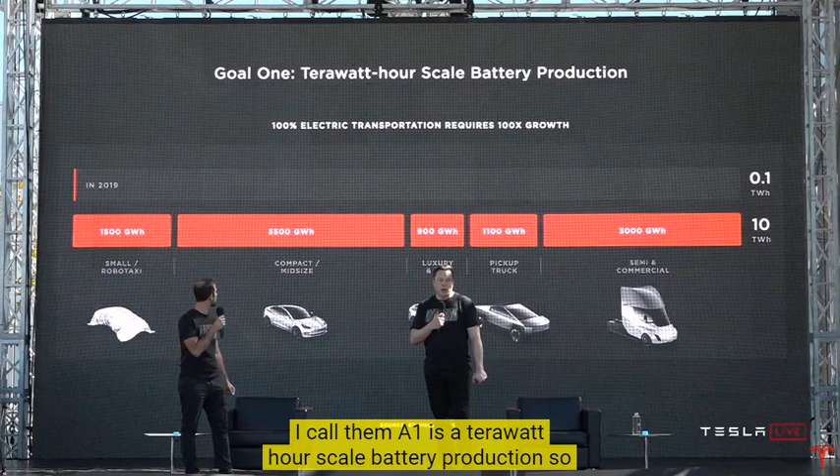So to accelerate the transition to sustainable energy, we must produce more EVs that need to be affordable, and a lot more energy storage, while building factories faster and with far less investment. So goal number one is terawatt-hour scale battery production. So tera is the new giga, and a terawatt is 1,000 times more than a gigawatt. So we used to talk in terms of gigawatts. In the future, we'll be talking in terms of terawatt hours. So this is what's needed in order to transition the world to sustainability.

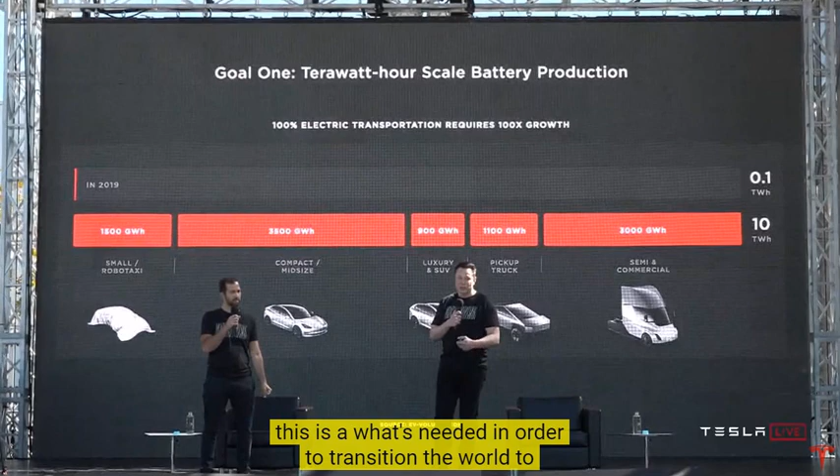Yeah, and you can see we're talking about 100x growth in batteries for electric vehicles to achieve this mission. And we are going to get there. It's just a matter of how fast, and our intention is to accelerate it. Yeah. You basically need on the order of roughly 10 terawatt hours a year of battery production to transition the global fleet of vehicles to electric. And the average vehicle lasts 15 years, so we're talking about 150 terawatt hours, give or take, to transition all vehicles of all types to electric. Yeah, so it's a lot of batteries, basically.

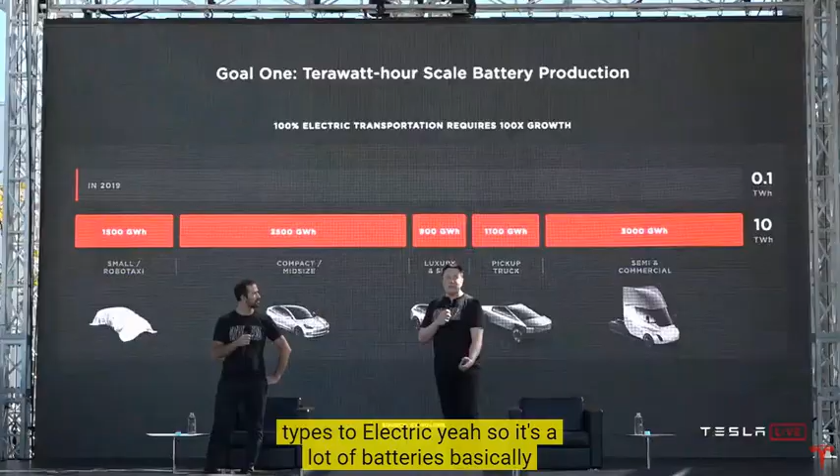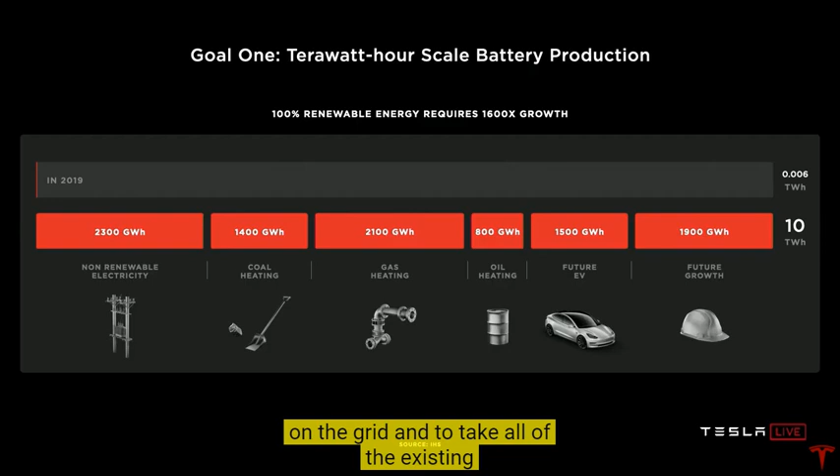And then on the grid side, we have a similar mountain to climb, 1,600 times growth from today's grid batteries to go 100% renewable on the grid, and to take all of the existing heating fossil fuel uses in homes and businesses 100% electric. Yeah, and this number, I think, might grow even more as the world economy matures and as countries with high populations industrialize. But let's say it's roughly 20 to 25 terawatt hours per year, sustained for 15 to 25 years to transition the world to renewable. This is a lot.

So today's batteries cannot scale fast enough. They're just too small. For Giga Nevada, 150 gigawatt hours per year is what we probably expect to make out of there. But this is really pretty small in the grand scheme of things. That's only 0.15 terawatt hours.

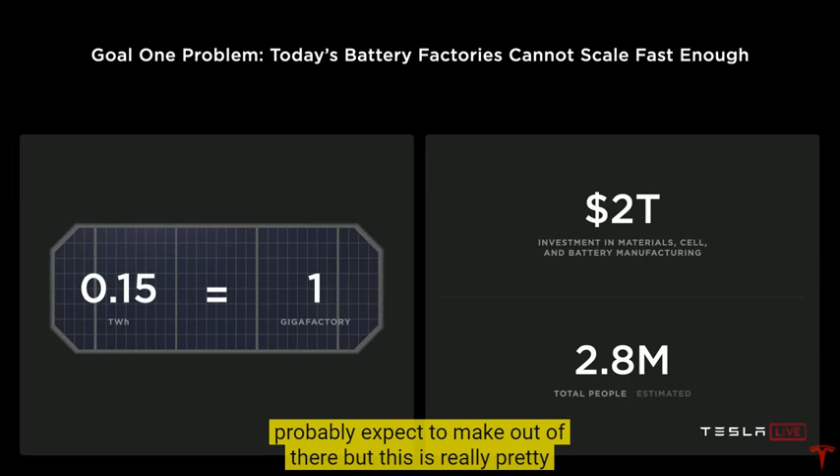And they cost too much. So we would need 135 fully built out Nevada gigafactories to achieve 20 terawatt hours a year. It's not scalable enough of a solution. We need a dramatic rethink of the cell manufacturing system to scale as fast as we can and should.

Yeah, and I think we should view this as more than just a question of money. Money is sort of like an ethereal thing, but it's really the amount of effort. You have a certain amount of effort, in terms of people and machines, and depending on how efficient that effort is, for a given amount of effort, you want the most amount of batteries.

So it's not just a question of like, well, if we had $2 trillion tomorrow you could make this. It's not that easy. You actually need to organize a massive number of people, build a lot of machines, build the machines that make the machines. And so it's incredibly important to have that effort yield the most number of batteries.

So, and then goal two, obviously, we need to make more affordable cars. I think one of the things that troubles me the most is that we don't yet have a truly affordable car, and that is something that we will make in the future. But in order to do that, we've got to get the cost of batteries down. We've got to be better at manufacturing, and we need to do something about this curve. The curve of the cost per kilowatt hour of batteries is not improving fast enough.

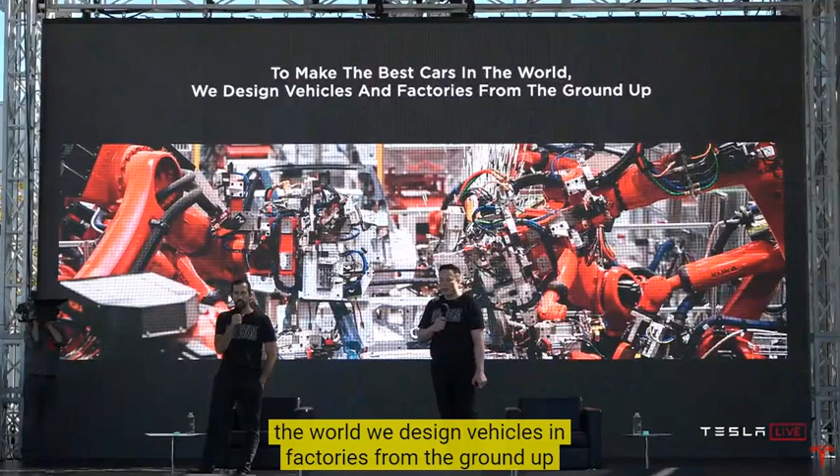And EV market share is growing, but EVs aren't accessible to all. And you can see, as Drew was saying, it's starting to flatten out a little bit because the rate of improvement of the affordability of cars is just not fast enough. So that's why we got Battery Day. Yeah. To make the best cars in the world, we design vehicles and factories from the ground up. Next. And now we do this for batteries as well.

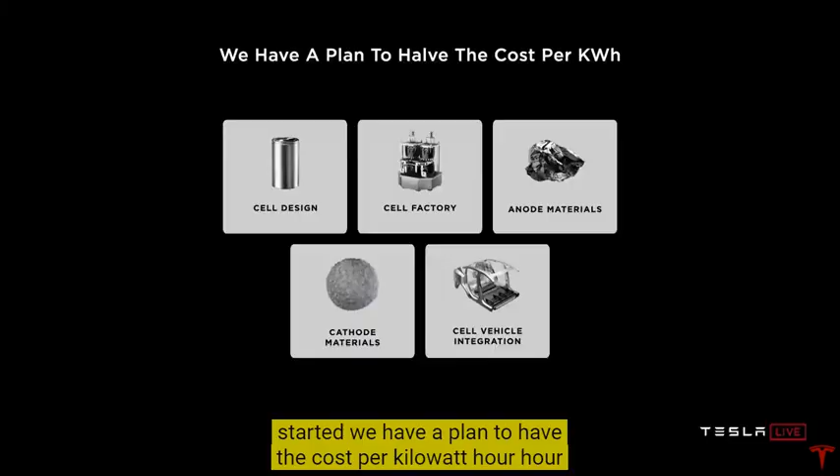Anyway. So let's get started. We have a plan to halve the cost per kilowatt hour. And it's not a plan that rests on a single innovation, some research project that'll never see the light of day. It's a plan that has taken creative engineering and industrialization across every facet of what makes a cell into a battery pack, from raw material to the finished thing.

And we're going to go through that plan with you today, step by step, and build up how we get to these goals and how we accelerate this transition and make our vehicles and our grid batteries more affordable. Yeah. I mean, we basically thought through every element of the battery, well, almost every element. There are a few more elements that we won't get to today, but we will get to in the future.

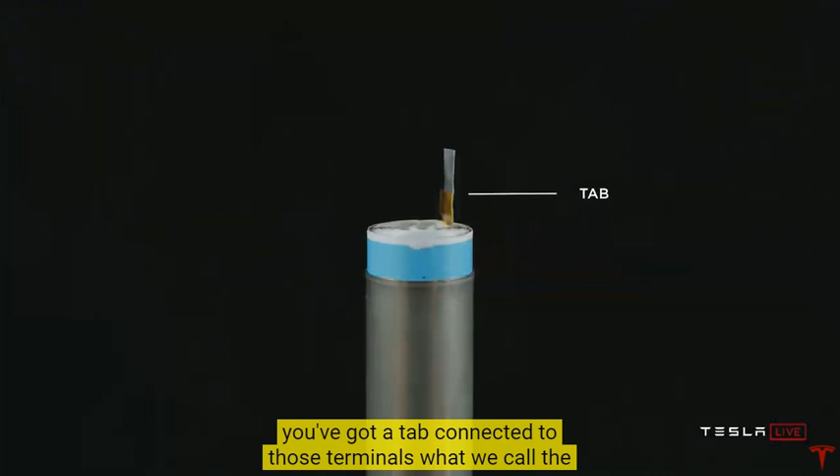So first, before we get too far into it, let's talk about what is in a battery cell. We've got the cap and the can, negative and positive terminals of the cell. When you open that cell, you've got a tab connected to those terminals, what we call the jelly roll, which is the wound electrodes on the inside. You can actually see what this looks like as you unwind it. This is over a meter long in a typical 2170 cell. So it's quite a long winding process. And you can see the tab still there.

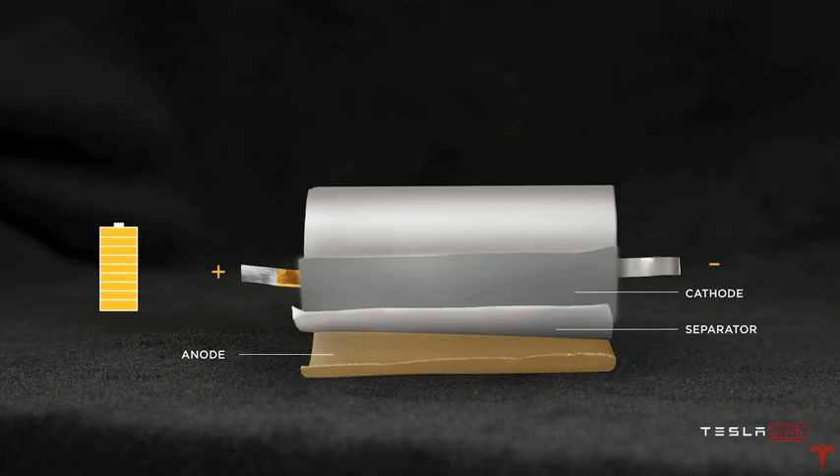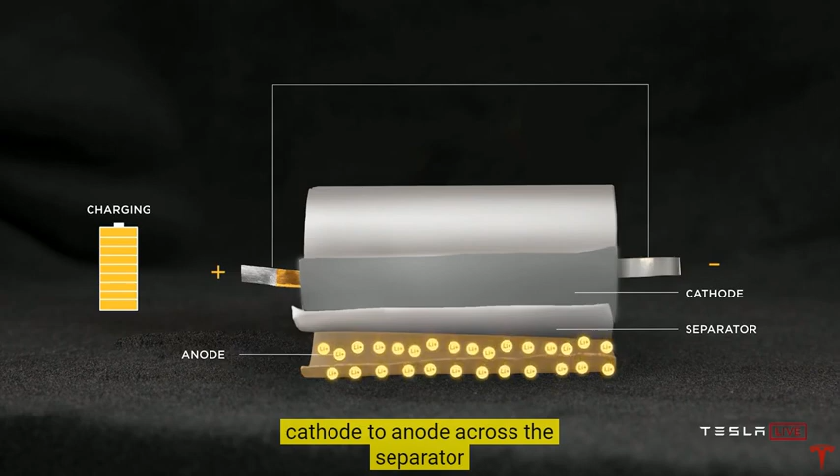And then to explain what's actually going on here, we've identified we've got anode, cathode, separator, positive and negative terminal. Watch what happens as we discharge the cell. Got lithium moving from anode to cathode, and then the reverse. When we charge the cell, lithium moving from cathode to anode across the separator. This is the basic of what makes all lithium-ion batteries, no matter what the form factor is.

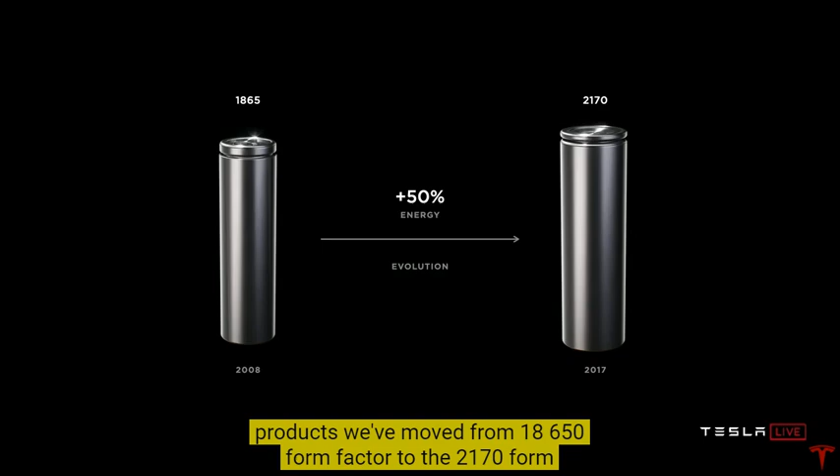And when we look at what's happened to date, at least in our products, we've moved from the 18650 form factor to the 2170 form factor through great collaboration with our partners, Panasonic, new partners like LG and CATL, and probably others in the future.

Yeah. Actually, a slight note on why one is called the 18650 versus the 2170: the first two digits refer to the diameter, and the second two digits refer to the length. So that helps explain what's up with these weird numbers. But nobody could explain to me why there was an extra zero. So I said, okay, we're deleting the zero that nobody can explain in future form factors. So that's why it's technically the 18650, bizarrely, but going forward it's the 2170 because we just got rid of the extra zero because it's pointless.

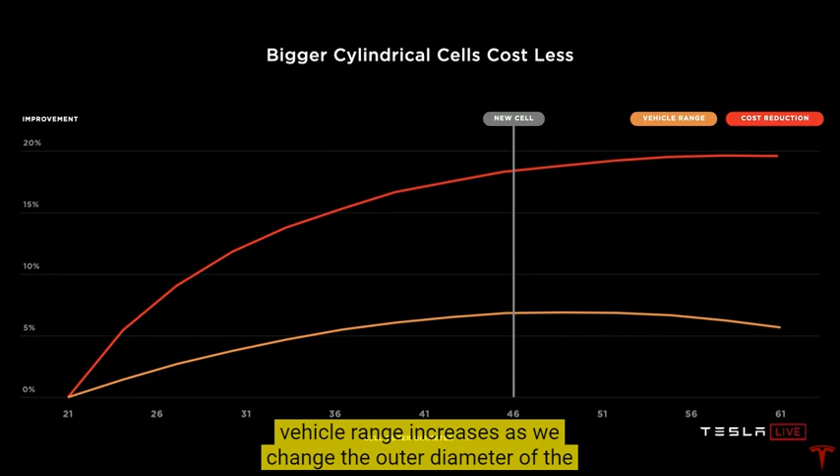And this was an evolutionary step, going from 1865 to 2170, bringing 50% more energy into the cell. But when we look to the ideal cell design, if we were to do it ourselves, we need to go beyond just what's in front of us and study the full spectrum of options. So as you can see, we swept the key figures of merit, how much we can reduce the cost, and how much vehicle range increases as we change the outer diameter of the cell. We found a sweet spot somewhere around 46 millimeters.

But it's not just about a bigger form factor. Anybody could make a bigger form factor. Any fool could make a bigger form factor. We're not any fool. Yeah, exactly. There are problems as you make cells larger. In fact, supercharging and thermals in general become really challenging as you make bigger cells. And this was the challenge that our team set our sights on to overcome.

And we did. We came up with this tabless architecture that maybe you've heard about, that basically removes the thermal problem from the equation and allows us to go to the absolute lowest cost form factor and the simplest manufacturing process. And this is what we mean when we talk about tabless. It's kind of a beautiful thing. Yeah, that's what these T-shirts mean, but it's very esoteric. Nobody could figure it out.

But yeah, we basically took the existing foils, laser patterned them, and enabled dozens of connections into the active material through this shingled spiral you can see, with simpler manufacturing, fewer parts, 50 millimeter versus 250 millimeter electrical path length, which is how we get all the thermal benefits. Yeah, this is important to appreciate. Basically the distance that the electron has to travel is just much less. So you actually have a shorter path length in a large tabless cell than you have in the smaller cell with tabs. This is a big deal. So even though the cell is bigger, it actually has more power. The power to weight ratio is actually better than the smaller cell with tabs.

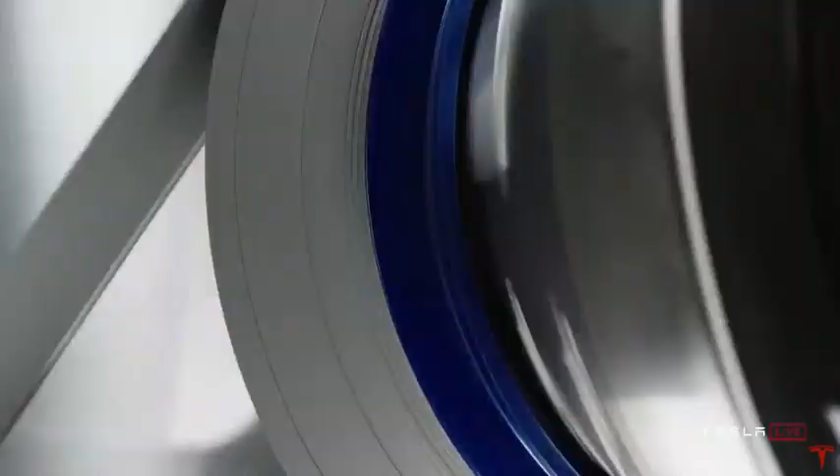Yeah, and I want to stress, this is not just a concept or a rendering. We are starting to ramp up manufacturing of these cells at our pilot 10 gigawatt hour production facility just around the corner. Yeah. So, yeah. It's a video of some of what's going on in the plant.

Now, to be clear, it will take about a year to reach the 10 gigawatt hour capacity. So this is important to appreciate. Like when you build a factory, there's a certain capacity that you design to, and then it takes some period of time to actually achieve that capacity. So I would say it's probably about a year before we get to the 10 gigawatt hour annualized rate with the pilot plant. And this is just a pilot plant.

The actual production plants will be more on the order of maybe 200 gigawatt hours, maybe more over time. And thank you.

But let's stack up everything we just saw at the cell level. So just the cell form factor change enables a 14% dollar per kilowatt hour reduction, just that cell form factor change. And now that you've been teased on this factory, we're going to go on and walk step by step through that factory and discuss a series of innovations there.

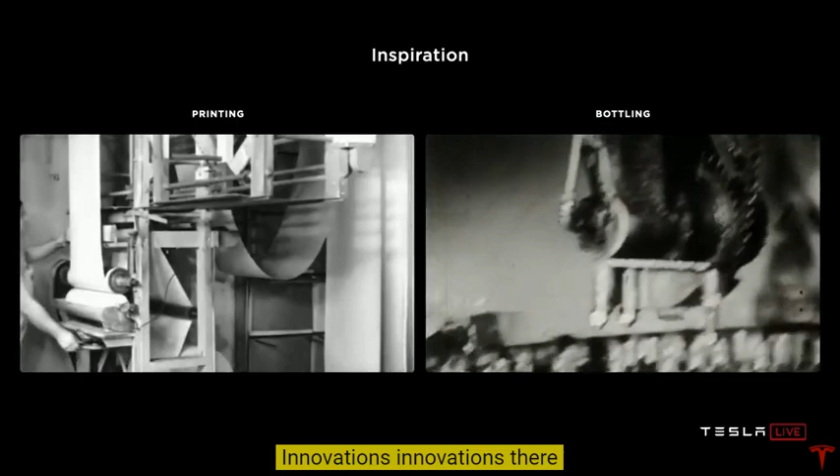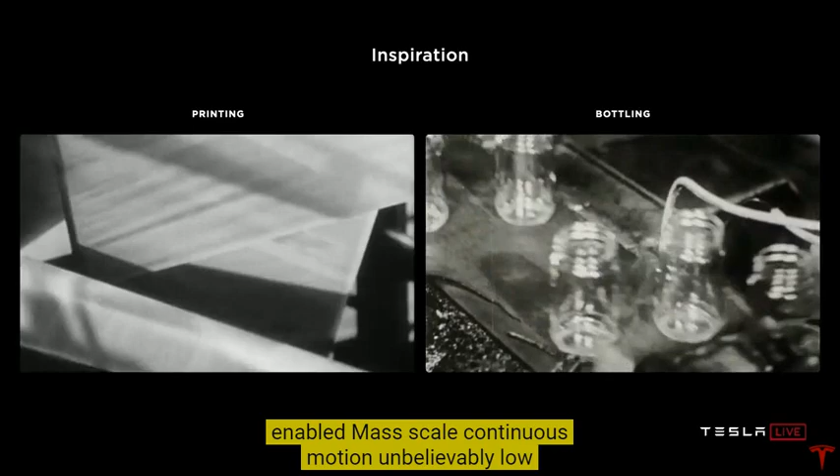When thinking about the ideal cell factory, we have inspirations behind us in the paper and bottling industry, where from humble beginnings, over a century of innovation has enabled mass scale, continuous motion, unbelievably low manufacturing cost. And when we think about the lithium-ion industry, which is really only in its 3rd decade of high-volume production, it has so far to go to achieve similar scale and simplicity. And that was the inspiration that we set out to the team as we thought about how to marry cell design and manufacturing in the best possible factory.

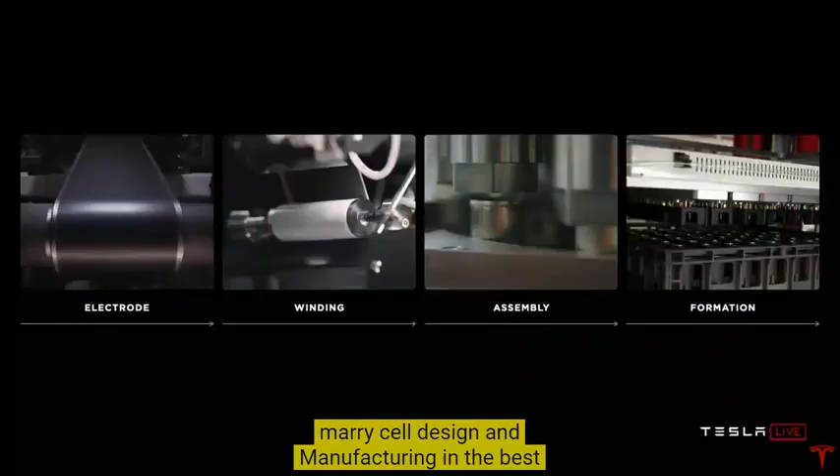And let's talk a little bit about what's in a cell factory. First, there's an electrode process where the active materials are coated into films onto foils. Then those coated foils are wound in the winding process we just talked about, where if you do have tabs, you have to start and stop a lot.

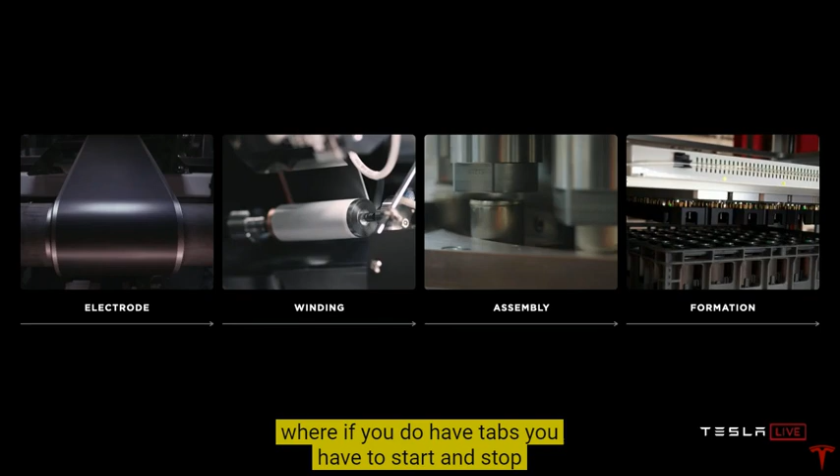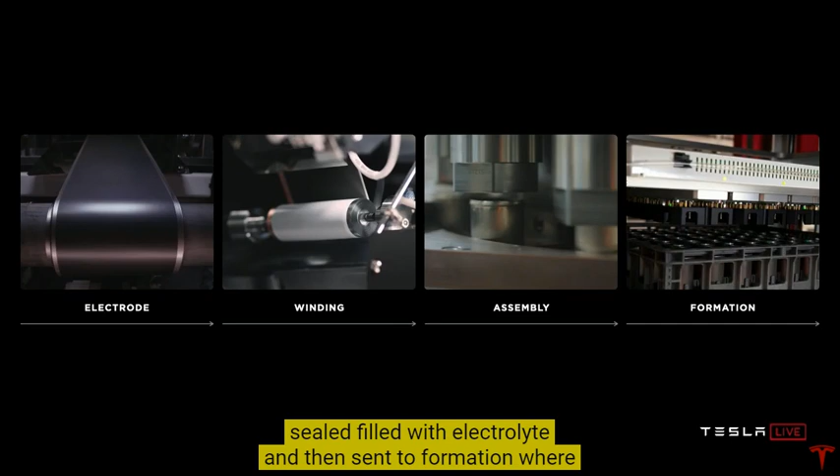Then the jelly roll is assembled into the can, sealed, filled with electrolyte, and then sent to formation, where the cell is charged for the first time, and where the electrochemistry is set and the quality of the cell is verified. And we set out at every step of this process to try to take that inspiration we just showed and think about how we make those processes fundamentally better and more scalable.

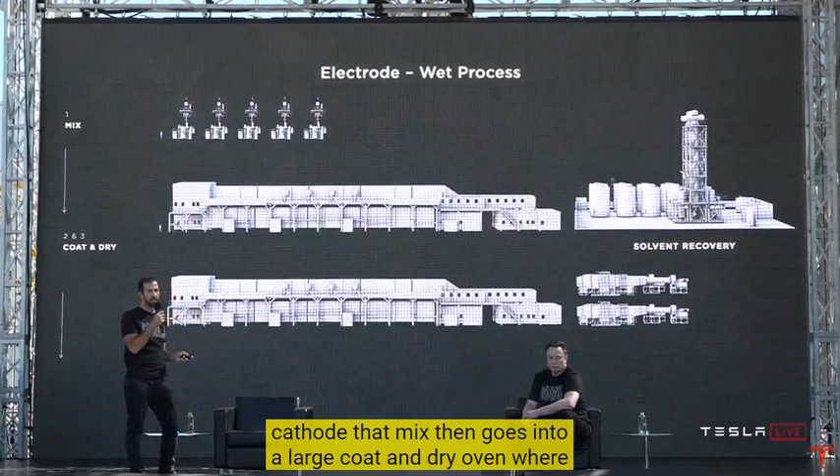And one of the most important processes is where it all begins, the wet process of the electrode coating. And just to give you all a sense of scale, I'm going to walk through what's in that wet process. You've got mixing, where the powders are mixed with either a water or a solvents for the cathode. That mix then goes into a large coat and dry oven, where the slurry is coated onto the foil, huge ovens, tens of meters long.

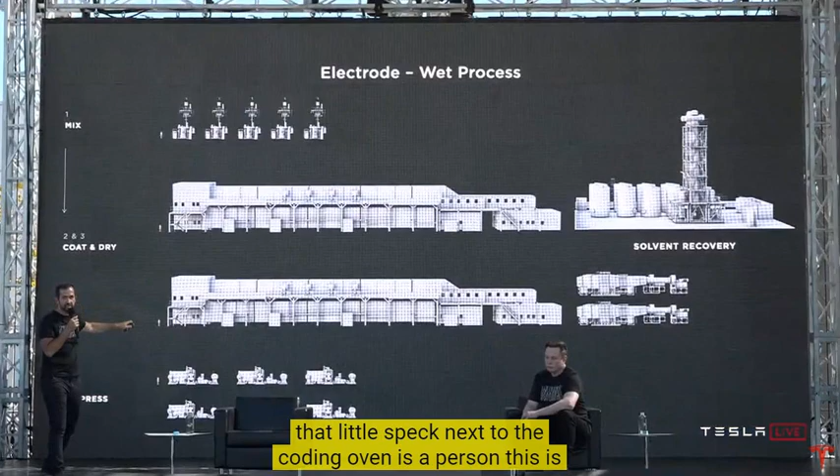Dried, and that solvent then has to be recovered. You can see the solvent recovery system. And then finally, the coated foil is compressed to the final density. And when you're looking at this, you're like, wow, that's a lot of equipment for one step, especially when you consider that little speck next to the coating oven is a person. This is serious iron involved in making batteries.

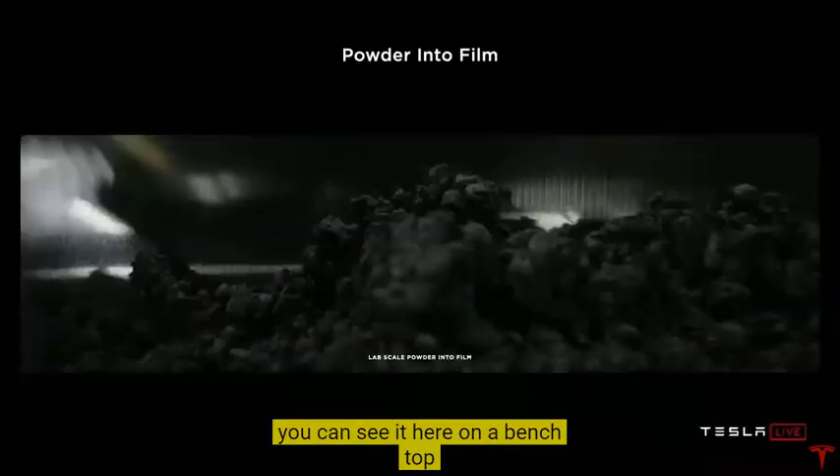Wouldn't it be great if we could skip that solvent step, which is one of those dig a ditch and then fill it kind of things where you put the solvent in and then take it out and recycle it, and just go straight to dry mix to coat? And that's what the dry process really is about. And in the most basic form, you can see it here on a bench top. Literally, powder into film. As simple as that.

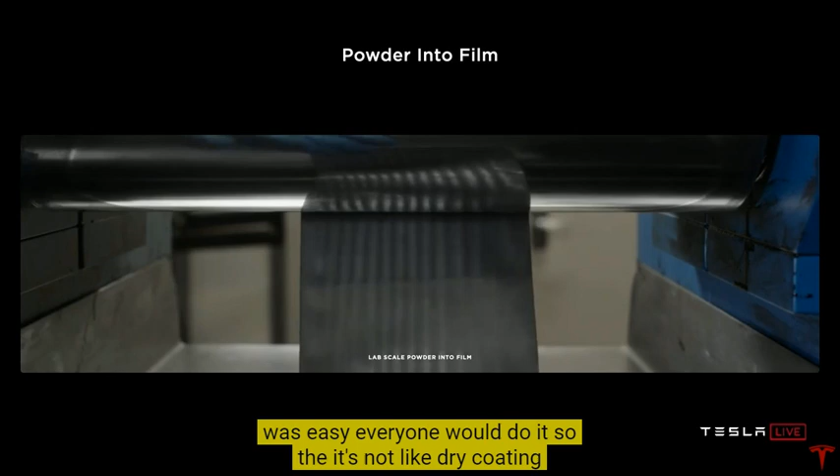I mean, it's hard, actually, just to be clear. So, if this was easy, everyone would do it. So it's not like dry coating electrode is actually easy. It's actually very hard to do what appears to be a simple thing.

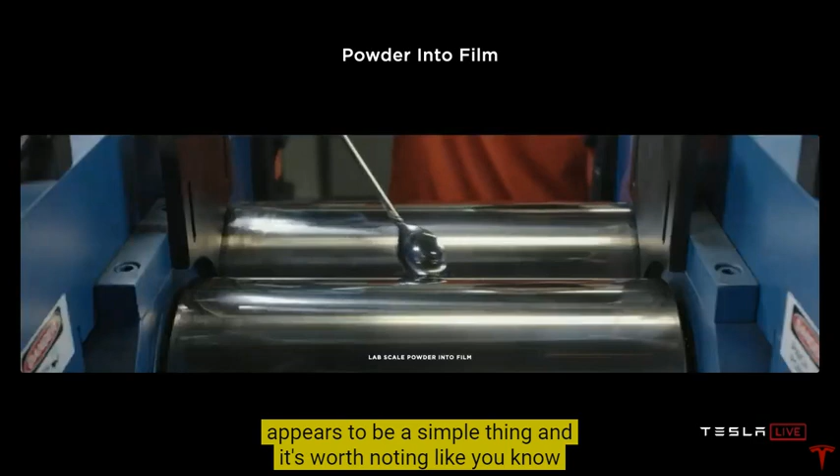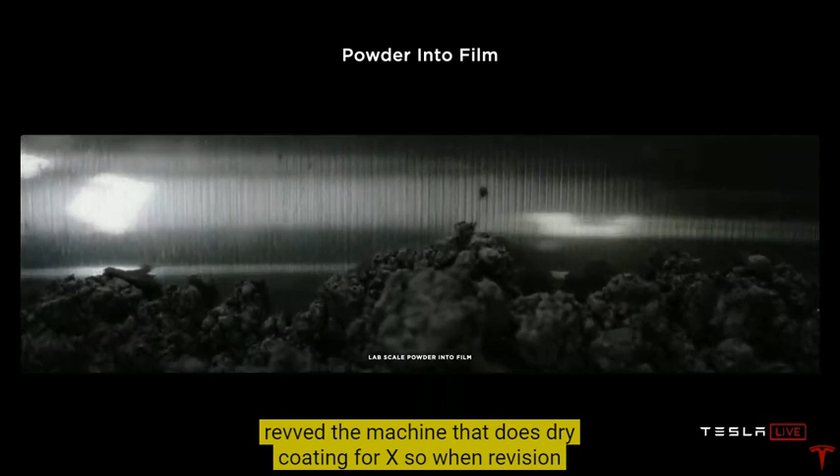And it's worth noting, we did acquire Maxwell a little over a year ago, I guess. And it's certainly a good company and everything, but the dry coating they had was sort of, I would call, proof of concept. Since the acquisition, we've actually revved the machine that does the dry coating 4 times. So we're in revision 4 post acquisition of the machine, and there's still a lot of work to do. So I would not say this is completely in the bag.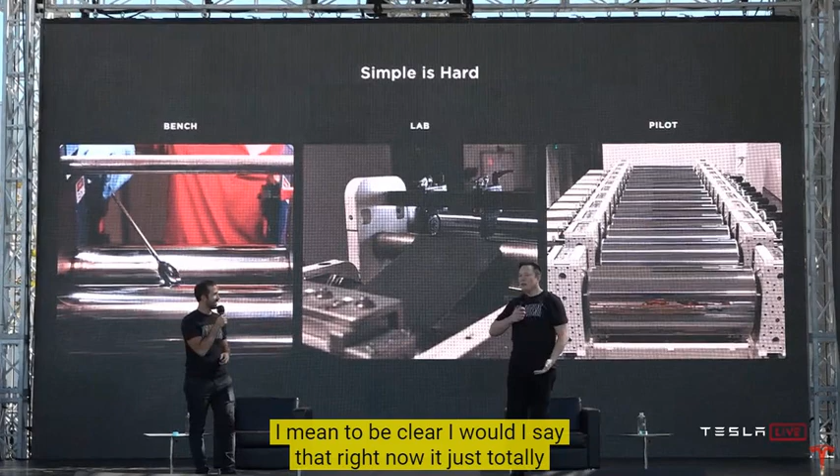But as Elon was saying, simple is hard. Yeah, I mean, to be clear, I would like to not say that right now it's just totally working. It's close to working. At the pilot plant level, it is close to working. Well, it's fair to say it does work, but with not a high yield. Yeah. So we're still ironing out the kinks, but we've made tens of thousands of cells, thousands of kilometers of electrode. I mean, we are on the 4th generation of the equipment, so we've learned a lot along the way.

Yeah. I mean, it is super demanding because every atom has its place if you want to deliver the energy density and the cycle life and the supercharging. But we're confident that we will get there, but it will be a lot of work along the way. There's a clear path to success, but a ton of work between here and there. Yep. But this is a really profound improvement. Again, for people that know battery manufacturing, this is gigantic.

We'll probably be on machine revision 6 or 7 by the time we do large-scale production. The rate at which the machines are being improved is extremely rapid. Literally every 3 or 4 months is a new rev. Yeah, and beyond the electrode, we continue to innovate on every other process step. So let's talk a little bit about assembly, which is next.

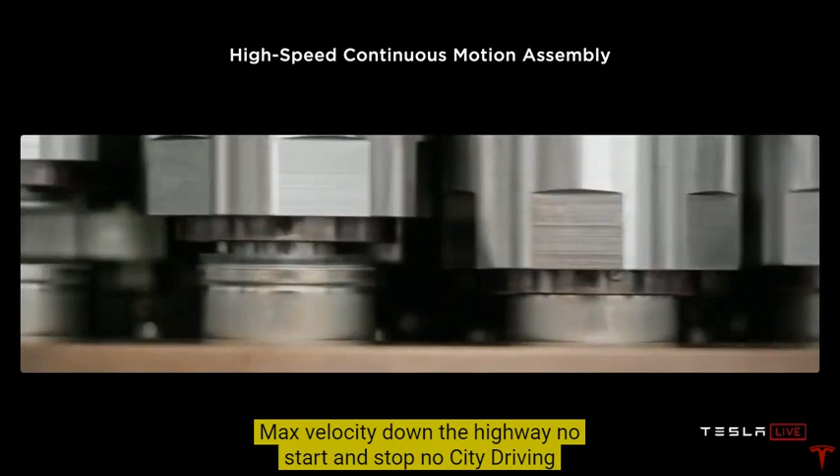The key to a high-performing assembly line is accomplishing processes while in motion, continuous motion, and thinking of the line as a highway, max velocity down the highway, no start and stop, no city driving. Exactly, no stoplights and traffic lights or anything. You want the highway. I want the highway. Yeah. And together with our internal design team that makes and designs this equipment, we coupled thinking about how to make the best cell with thinking about how to make the best equipment so that we could accomplish the fastest parts per minute rates on all of these tools.

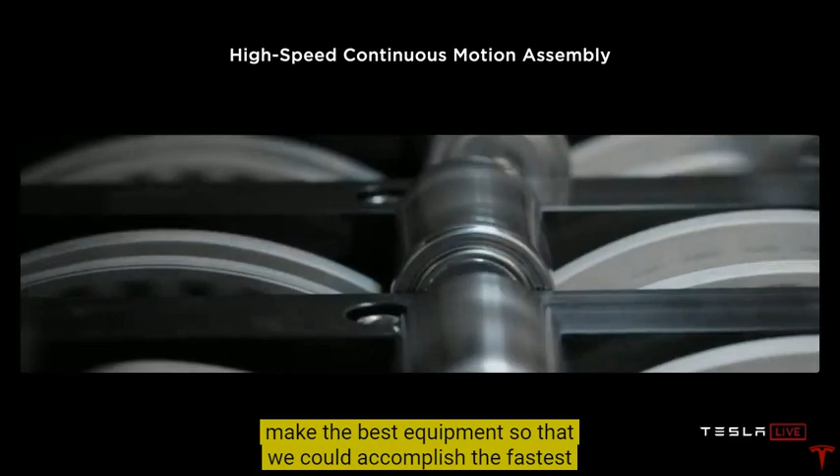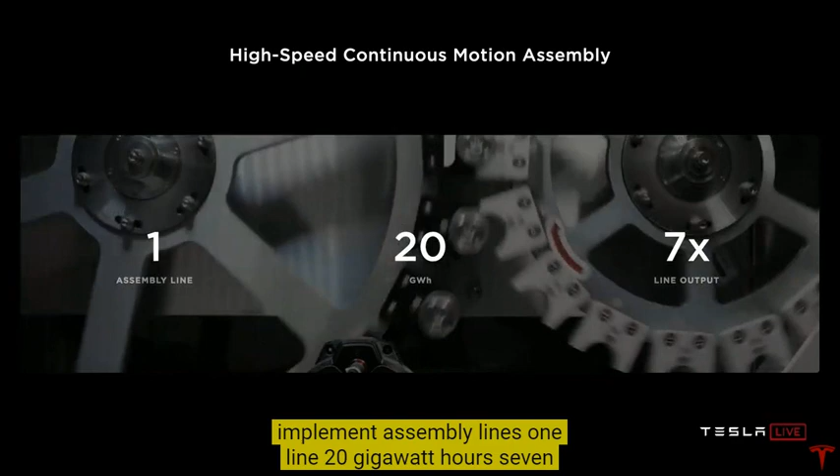And through all of that development, we were able to get to the point where we can implement assembly lines: one line, 20 gigawatt hours, 7 times increase in output per line. And when you're thinking about scalability and pure effort, having one line be 7x the capability is just effort multiplying.

Yeah, you can sort of think about the fundamental physics of a factory. I think it's actually quite a lot like the rocket equation, where in the rocket equation you've got your exhaust velocity and then the log of the start to end masses. So it's basically saying, how fast are things going and what percentage of the factory volume is doing useful work. And conveyance does not count as useful work. Only the value-added steps.

Yeah, if you break the factory down into cubic meter sections, or smaller, like 1 liter sections, and say, is a majority of this volume doing useful work? You would be astounded at how bad most factories are. They're maybe 2 or 3%, including our factory in Fremont. So I think it is possible to get to at least 10 times that volumetric efficiency. So more like 30%-ish, maybe more, and be 10x better, which means the factory can be 10 times smaller. And then the other thing is how fast are things going through the factory? It's like speed and density.

The faster you go, like if a factory that's moving at say twice the speed of another factory is equivalent to two factories basically, and the company that will be successful is the company that with one factory can accomplish what other companies take 2 or 3 or 4 factories to do. So this is what we're trying to do here is say, okay, how do we with one factory achieve what maybe 5 or even 10 factories would normally be required to achieve?

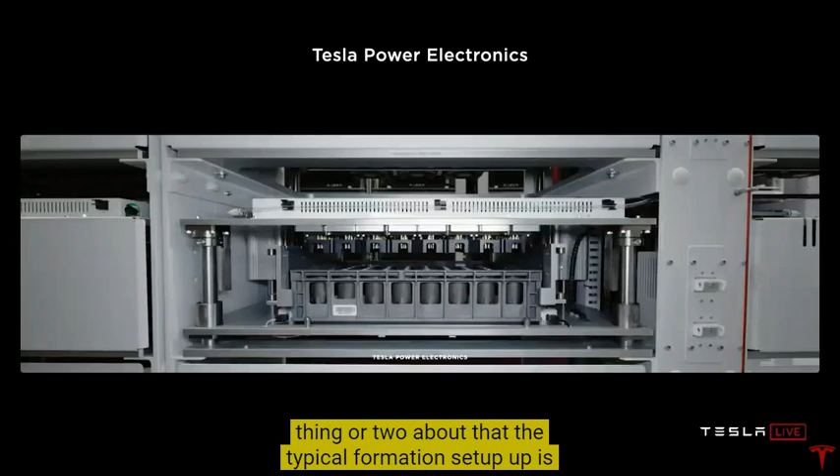Okay, now let's talk about formation. In a typical cell factory, formation represents 25% of the investment. And what is formation? It's charging and discharging cells and verifying the quality of the cell. Turns out we've charged and discharged billions and billions of cells in our vehicles, so we know a thing or two about that. The typical formation setup is you charge and discharge each cell individually. In our car, we charge thousands of cells at once.

And we took our principle and our power electronics, leveraging Powerwall, vehicle battery management systems, and others, to dramatically improve the formation equipment cost effectiveness and density. 86% reduction in formation investment, 75% reduction in footprint. So.

You want to take this one? Sure. So essentially what this translates to, based on what we know today, is about a 75% reduction in the investment per kilowatt hour or gigawatt hour. It's just basically 4 times better than the current state of the art to the best of our knowledge. And I think there's probably room to improve even beyond that. Definitely, yeah.

We're able to, from a volume standpoint, in a smaller form factor than Giga Nevada, get many times the cell output. So you can see, basically we can get a terawatt hour in less space than it took to make 150 gigawatt hours. So this is pretty profound.

I would actually not have thought this was possible several years ago, that we could actually get to terawatt hour scale in less space than what we currently envision for doing 150 gigawatt hours. Yes, simpler accelerates terawatt hour scale, and that's what we need to do to accelerate our mission. And as Elon said, we're going to try to even improve on this as we push towards our goals.

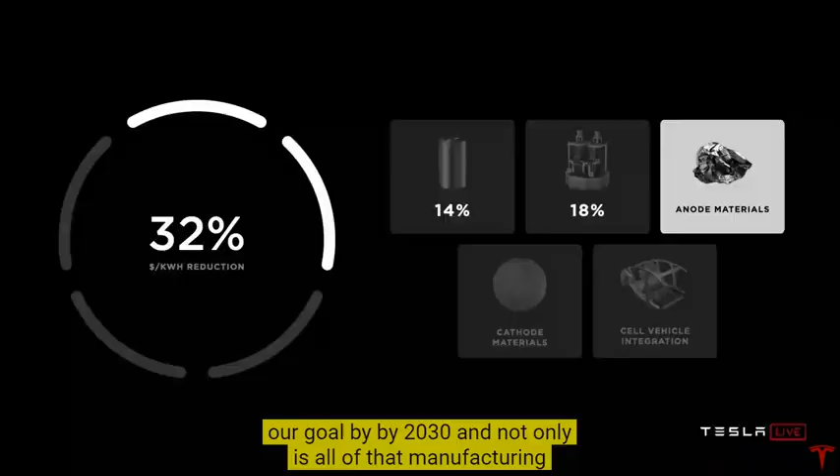And not only is all of that manufacturing innovation fantastic for enabling scale, it's also an additional 18% reduction in dollar per kilowatt hour at the battery pack level. But wait, there's more.

Yeah. So we have a manufacturing system. We've got a cell design. What are the active materials we're going to put in that cell design? Let's talk about the anode first. Let's talk about silicon. Why is silicon awesome? It's awesome because it's the most abundant element in the Earth's crust after oxygen, which means it's everywhere. It's sand. Yeah. Sand is silicon dioxide.

And it happens to store 9 times more lithium than graphite, which is the typical anode material in lithium-ion batteries today. So why isn't everybody using it? The main reason is because the challenge with silicon is that it expands 4x when fully charged with lithium. And basically, all of that expansion stress on the particles start cracking, they start electrically isolating, you lose capacity, the energy retention of the battery starts to fade, and it also gums up with a passivation layer that has to keep reforming as the particles expand.

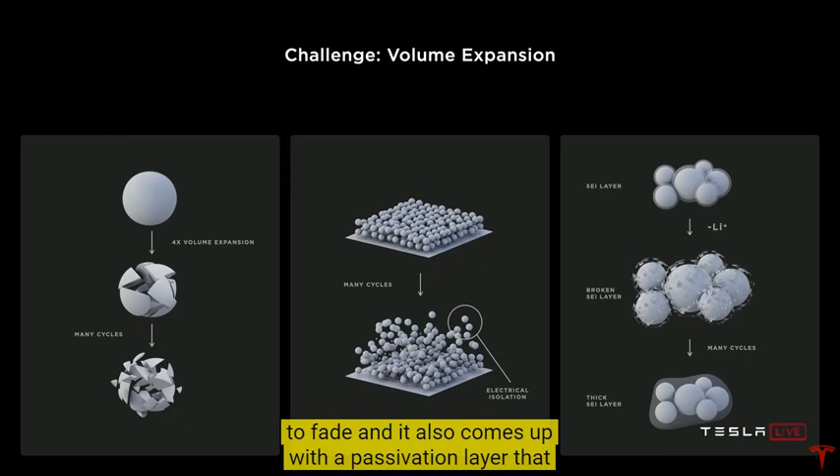Yeah, basically, with silicon, the cookie crumbles and gets gooey. That's basically what happens. Good analogy. And current approaches to solve this, which exist, I mean, we have silicon in the cars that you're all in right now, involve highly engineered, expensive materials in the scheme of things. Now, they're still great, and they enable some of the benefits of silicon. They just don't enable all of it, and they're not scalable enough. And you can see some of the things that maybe you've heard of, SiO, silicon with carbon, or silicon nanowires. That's kind of the space right now.

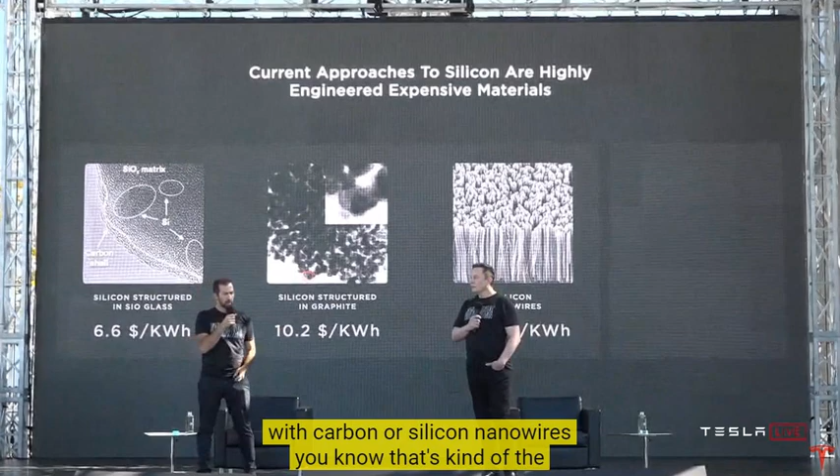What we're proposing is a step change in capability and a step change in cost. And what that really is, is to just go to the raw metallurgical silicon itself. Don't engineer the base metal. Just start with that and design for it to expand in how you think of the particle in the electrode design and how you coat it. I'm not sure if you saw this. Basically, $1 per kilowatt hour. If you use simple silicon, it's dramatically less than even the silicon that is currently used in the batteries that are made today. And you can use a lot more of it. The anode costs $1.20 a kilowatt hour.

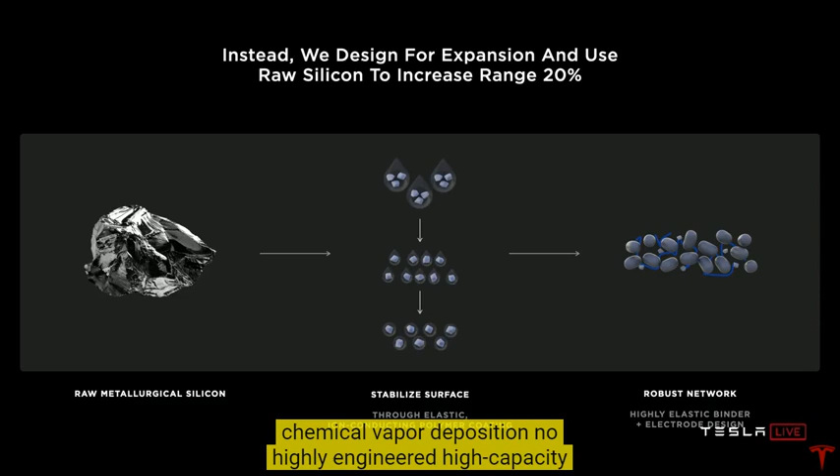And how does it work? Start with raw metallurgical silicon, stabilize the surface with an elastic ion-conducting polymer coating that is applied through a very scalable approach. No chemical vapor deposition, no highly engineered high capex solutions, and then integrated into the electrode through a robust network formed out of a highly elastic binder. And in the end, by leveraging this silicon to its potential, we can increase the range of our vehicles by an additional 20%, just this improvement. It gets cheaper and longer range. And when we take that anode cost reduction, we're looking at another 5% dollar per kilowatt hour reduction at the battery pack level. And there's more.

Let's talk about cathodes. What is a battery cathode? Cathodes are like bookshelves where the metal, the nickel, the cobalt, the manganese, or aluminum is like the shelf, and the lithium is the book. And really, what sets apart these different metals is how many books of lithium they can fit on the shelves and how sturdy the shelves are. Sorry, I was just going to say, it's tough to exactly figure out the right analogy to explain cathode and anode, but a bookshelf is probably a pretty good one in the sense that you need a stable structure to contain the ions. So you want a structure that does not crumble or get gooey, that holds its shape in both the cathode and the anode. As you're moving these ions back and forth, it needs to retain its structure. If it doesn't, then you lose cycle life and your battery capacity drops very quickly. Absolutely, I totally agree.

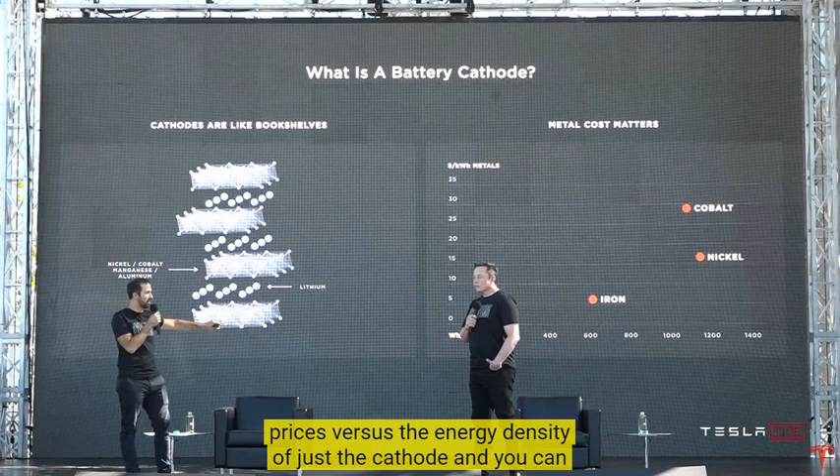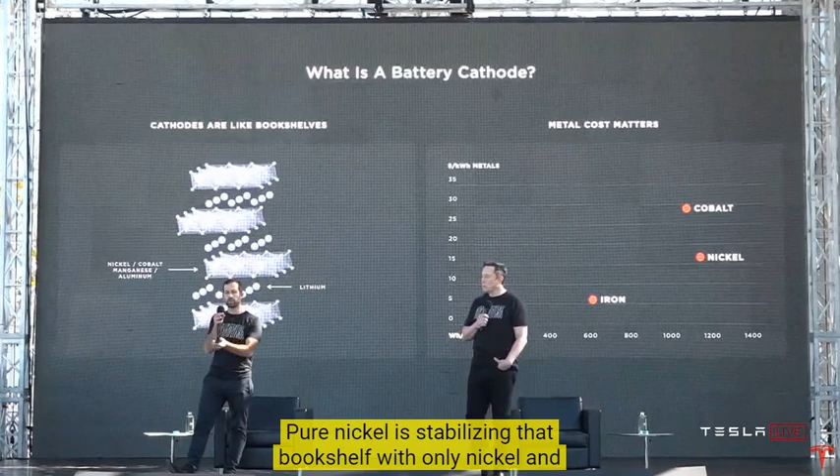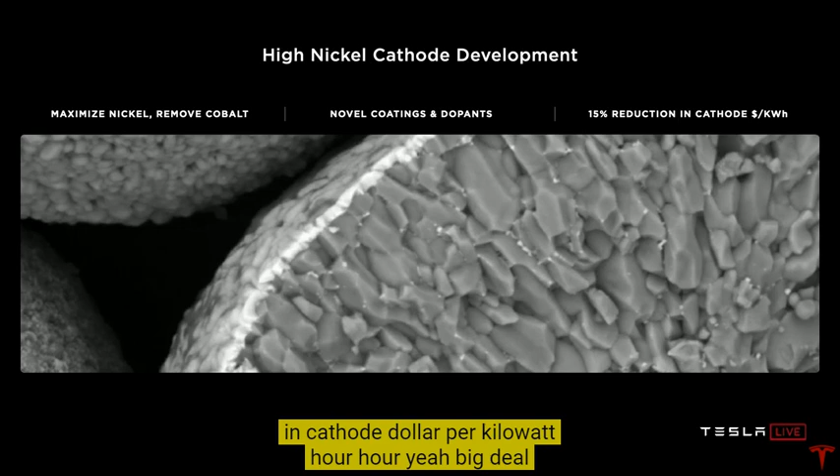People are always talking about, what's the cathode going to be? Is it NCA or whatever? The thing to consider is just fundamentally what the metals are capable of, and that's what we have on the chart here. Dollar per kilowatt hour cathode of just the metal, using just LME, London Metal Exchange prices, versus the energy density of just the cathode. And you can see nickel is the cheapest and the highest energy density, and that's why increasing nickel is a goal of ours and really everybody's in the battery industry. But one of the reasons why cobalt is even used at all is because it is a very stable bookshelf, and the challenge with going to pure nickel is stabilizing that bookshelf with only nickel. And that's what we've been working on with our high nickel cathode development, which has 0 cobalt in it. Leveraging novel coatings and dopants, we can get a 15% reduction in cathode dollar per kilowatt hour. It's a big deal.

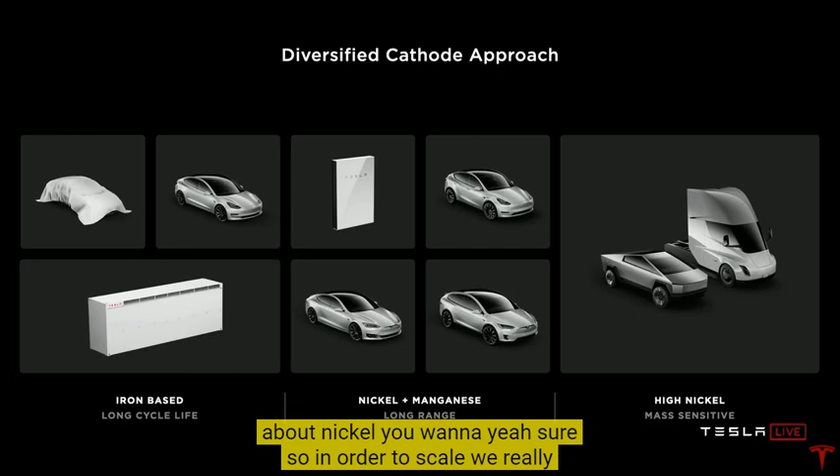But it's not just about nickel. You want to? Yeah, sure. So in order to scale, we really need to make sure that we're not constrained by total nickel availability. I actually spoke with the CEOs of the biggest mining companies in the world and said, please make more nickel. It's very important. And so I think they are going to make more nickel.

But I think we need to have a kind of a 3-tiered approach to batteries. So starting with iron, that's kind of like a medium range, and then nickel manganese as sort of a medium plus, intermediate, and then a high nickel for long range applications like Cybertruck and the Semi. Something like a semi truck, it's extremely important to have high energy density in order to get long range.

And just to give iron a bit more time, although if you look at the watt-hours per kilogram at the cathode level of iron, it looks like nickel's twice as good. But when you've fully considered at the pack level, everything else taken into account, nickel is maybe 50 or 60% better than iron. So iron is a little better than it would seem. It's not as good as nickel, but it's actually pretty good. And so, good for stationary storage and for medium range applications where energy density is not paramount.

And then, like I said, for intermediate, it's kind of a nickel manganese. And it's relatively straightforward to do a cathode that's 2/3 nickel, 1/3 manganese, which would then allow us to make 50% more cell volume with the same amount of nickel, with very little energy trade-off. Just enough that you still want to use 100% nickel for something like a semi-truck, but really not much of a sacrifice at all.

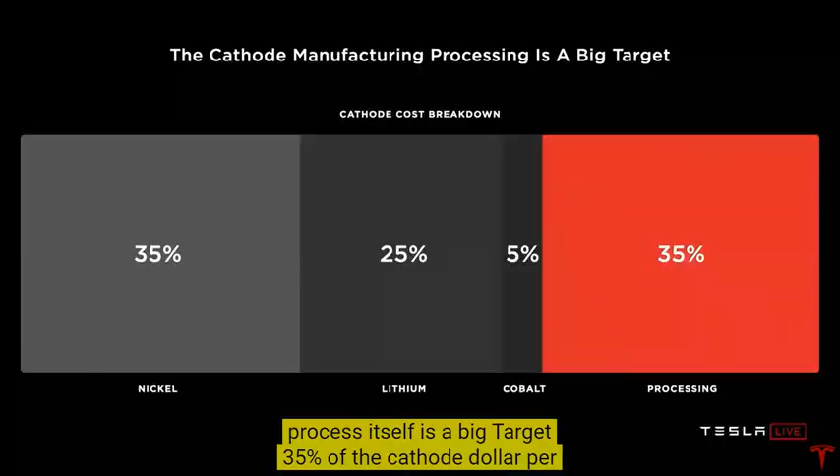Yeah. And beyond the metals, because a lot of people spend time talking about the metals, actually the cathode process itself is a big target. 35% of the cathode dollar per kilowatt hour is just in transferring it into its final form. And so we see that as a big target, and we decided to take that on. Here's a view of the traditional cathode process.

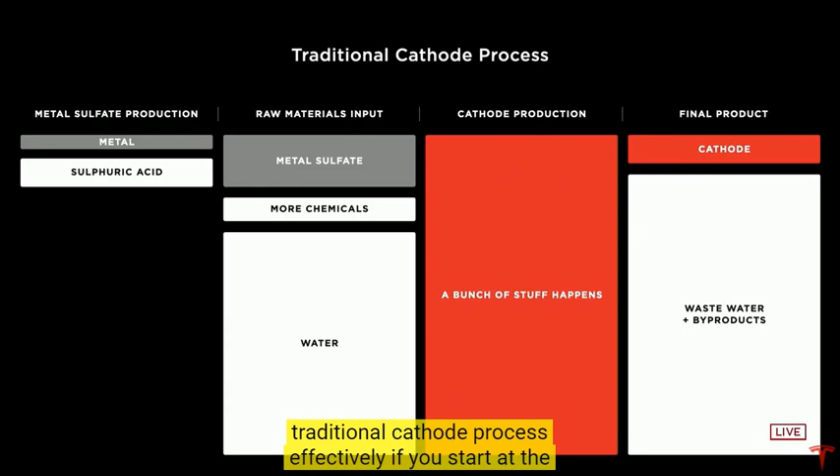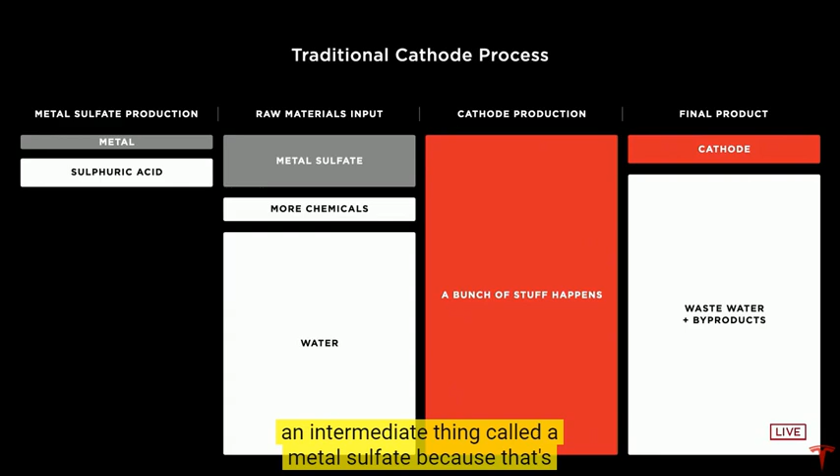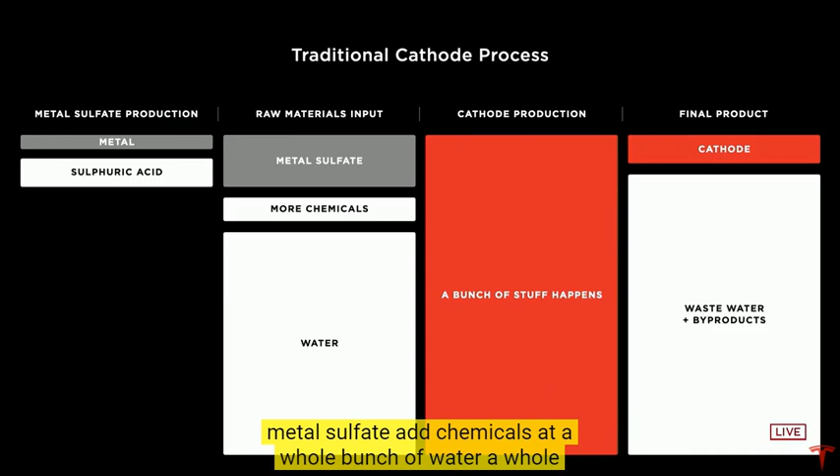Effectively, if you start at the left and you have the metal from the mine, the first thing that happens is the metal from the mine is changed into an intermediate thing called a metal sulfate, because that just happened to be what chemists wanted a long time ago. And then when you're making the cathode, you have to take this metal sulfate, add chemicals, add a whole bunch of water, a whole bunch of stuff happens in the middle, and at the end, you get that little bit of cathode and a whole bunch of wastewater and byproducts.

Yeah, it's insanely complicated. If you look at the total, it's a small world journey of: I am a nickel atom, what happens to me? And it's crazy. You're going around the world 3 times. There's the moral equivalent of digging the ditch, filling in the ditch, and digging the ditch again. It's total madness, basically.

And these things just grew up as legacy things, how it was done before, and then they connected the dots, but really didn't think of the whole thing from a first principles standpoint, saying how do we get from the nickel ore in the ground to the finished nickel product for a battery. And so we've looked at the entire value chain and said, how can we make this as simple as possible? And that's what we're proposing here with our process.

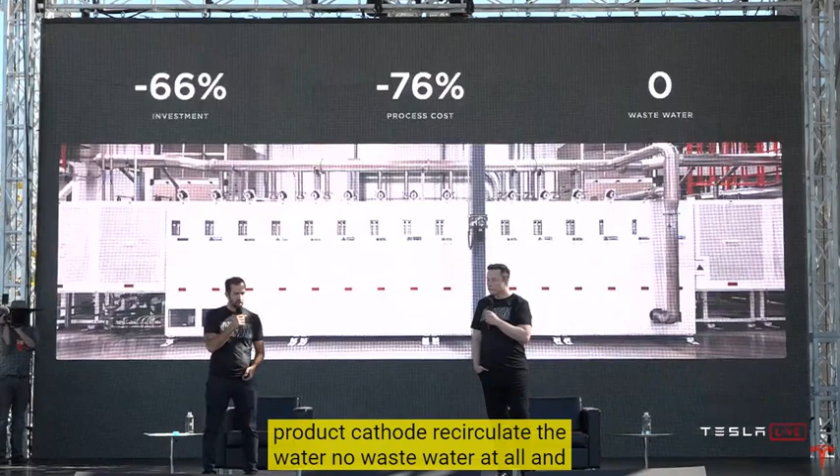As you can see, a whole lot less is going on here. We get rid of the intermediate: metal, water, final product cathode, recirculate the water, no wastewater at all. And when you summarize all of that, it's a 66% reduction in CapEx investment, a 76% reduction in process cost, and zero wastewater. Much more scalable solution. Yeah.

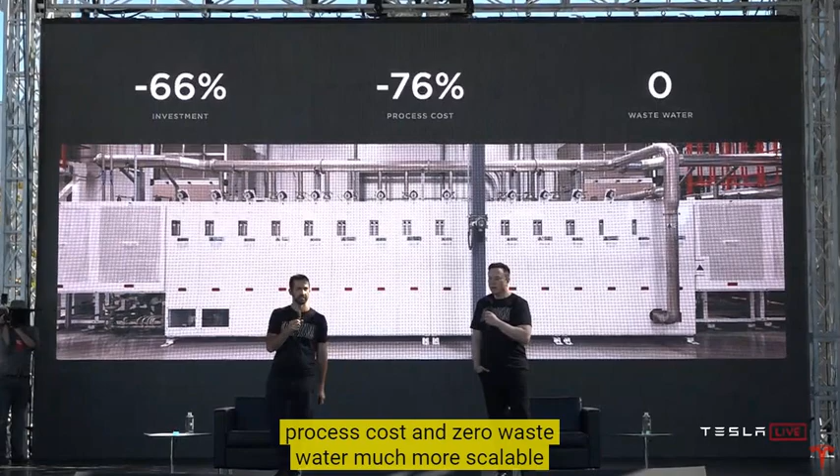And then when you think about the fact that now we're actually just directly consuming the raw metal nickel powder, it dramatically simplifies the metal refining part of the whole process. So we can eliminate billions in battery-grade nickel intermediate production. It's not needed at all. And we can also use that same process we showed on the previous page to directly consume the metal powder coming out of recycled electric vehicle and grid storage batteries. So this process enables both simpler mining and simpler recycling.

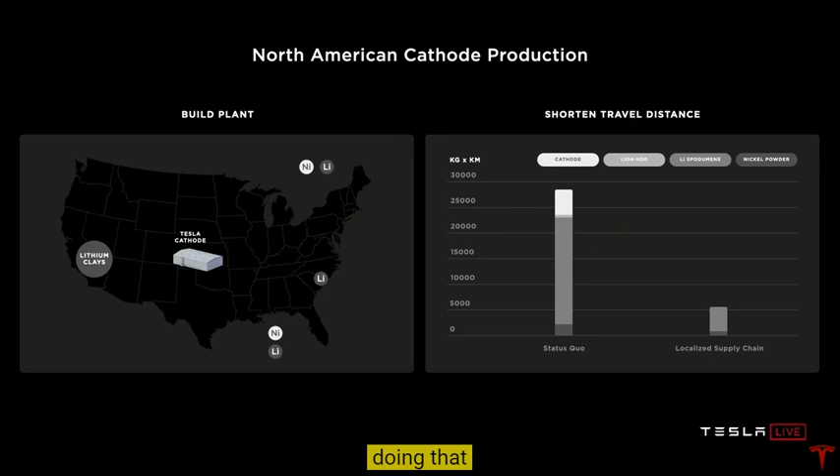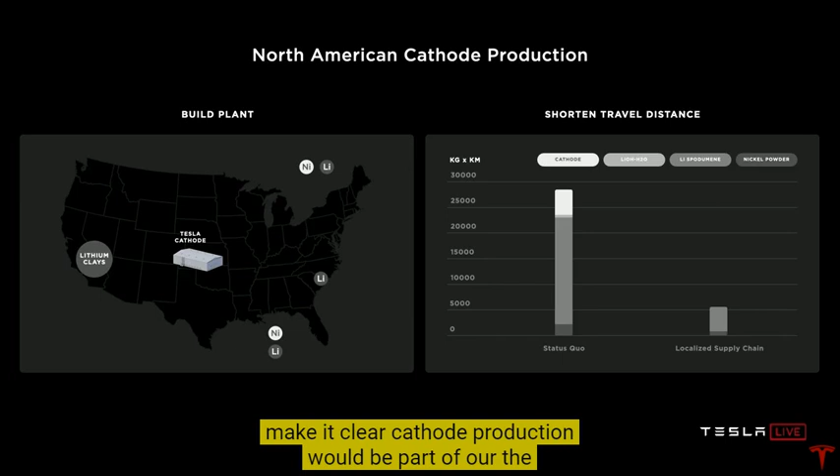And now that we have this process, obviously we're going to go and start building our own cathode facility in North America and leveraging all of the North American resources that exist for nickel and lithium. And just by localizing our cathode supply chain and production, we can reduce miles traveled by all the materials that end up in the cathode by 80%, which is huge for cost. Yeah, to be clear, cathode production would be part of the Tesla cell production plant.

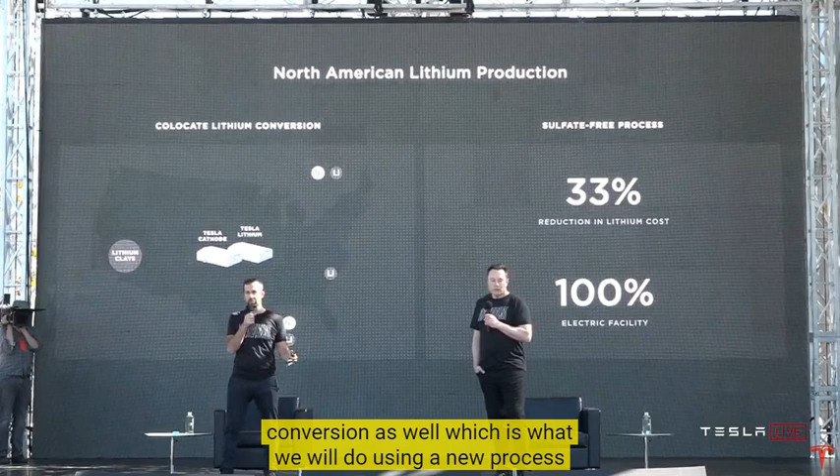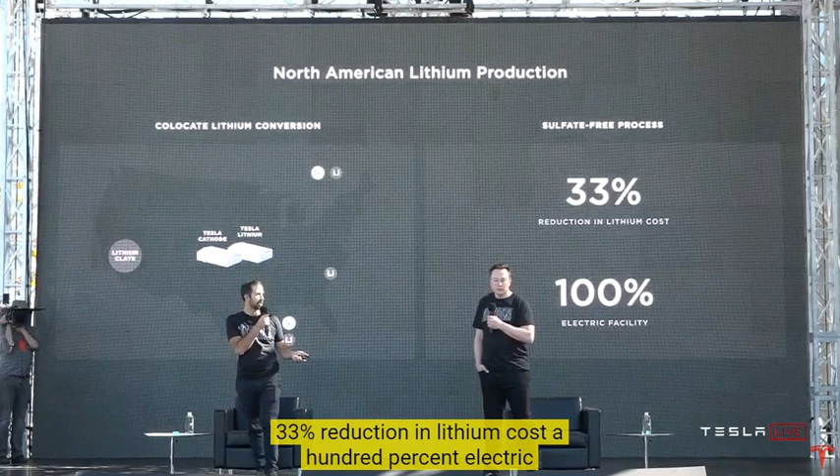So it would just be, basically, raw materials coming from the mine, and from raw materials in the mine, out comes a battery. And on that note, the way the lithium ends up in the cell is through the cathode. So then we should obviously do on-site lithium conversion as well, which is what we will do using a new process that we're going to pioneer. That's a sulfate-free process, again skipping the intermediate. 33% reduction in lithium cost, 100% electric facility co-located with the cathode plant. Yeah.

So it's important to note that there is a massive amount of lithium on Earth. Lithium is not like oil. There's a massive amount of it pretty much everywhere. In fact, there's enough lithium in the United States to convert the entire United States fleet to electric. All the cars in the United States, there's like 300 million or something like that. Every vehicle in the United States can be converted to electric using only lithium that is available in the United States. Discovered today, what we already know exists. People really haven't even been looking, because it's just widely available.

But it is important to ask, what is the smartest way to take the ore and extract the lithium, and do so in an environmentally friendly way? And we actually discovered, again looking at it from a first principles physics standpoint instead of just the way it's always been done, that we can actually use table salt, sodium chloride, to basically extract the lithium from the ore. Nobody's done this before, to the best of my knowledge, and all the elements are reusable.

It's a very sustainable way of obtaining lithium, and we actually got rights to a lithium clay deposit in Nevada, over 10,000 acres. And the nature of the mining is also very environmentally sensitive, in that we take a chunk of dirt out of the ground, remove the lithium, and then put the chunk of dirt back where it was. So it will look pretty much the same as before, it will not look terrible, it'll be nice. So simply mix clay with salt, put it in water, salt comes out with the lithium, done.

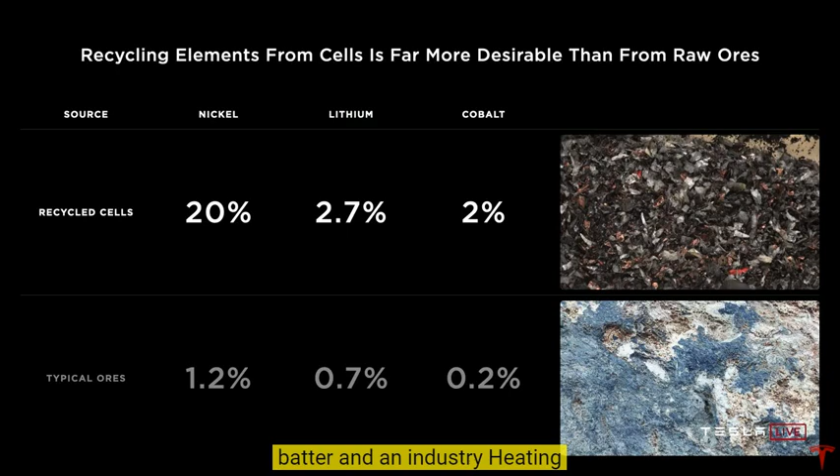And eventually, as we said at the beginning, when we get to this steady state of 20 terawatt hours per year of production, we will transfer the entire non-renewable fleet of power plants, home heating, industry heating and vehicles to electric. And at that point, we have an awesome resource in those batteries to recycle to make new batteries, so we don't need to do any more mining. And you can see why. The difference in the value of the material coming back from the vehicle versus the ground, you'd always go to the vehicle.

And we recycle 100% of our vehicle batteries today. And actually, we are starting our pilot full-scale recycling production at Gigafactory Reno next quarter to continue to develop this process as our recycling returns grow. To date it's been done by third parties, but we think we can recycle the batteries more effectively, especially since we know our batteries, we're making the same battery as the thing we're recycling, whereas third-party recyclers have to consider batteries of all kinds.

And just to think about what this actually means, the recycling resource is always 10 or more years delayed because batteries last a really long time. But eventually, it is the way that all resources will be made available, and that's why we're investing in this recycling facility in Nevada. Long-term, new batteries will come from old batteries once the fleet reaches steady state. Right. Okay, so we just talked about scaling cathode and recycling.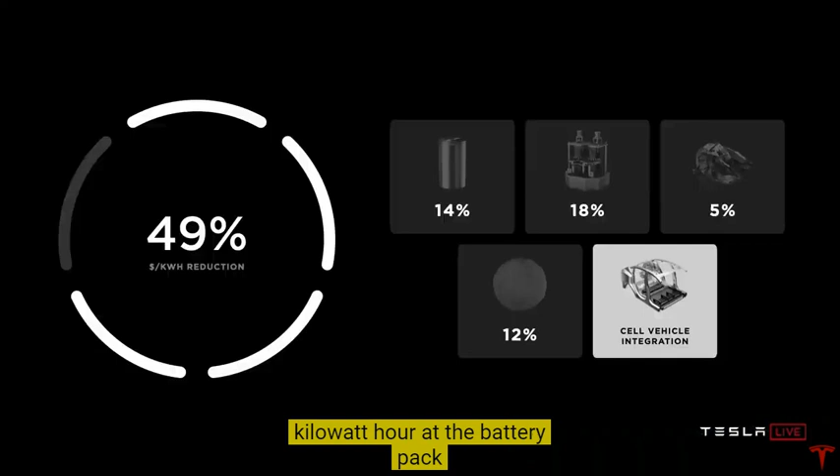All of the benefits that you just saw are added to this benefit of a 12% reduction in dollars per kilowatt hour at the battery pack level. Almost at our halve the cost goal, but there's one more section. Take it away, Elon. Great.

So there's an architecture that we've been wanting to do at Tesla for a long time, and we finally figured it out. And I think it's the way that all electric cars in the future will ultimately be made. It's the right way to do things.

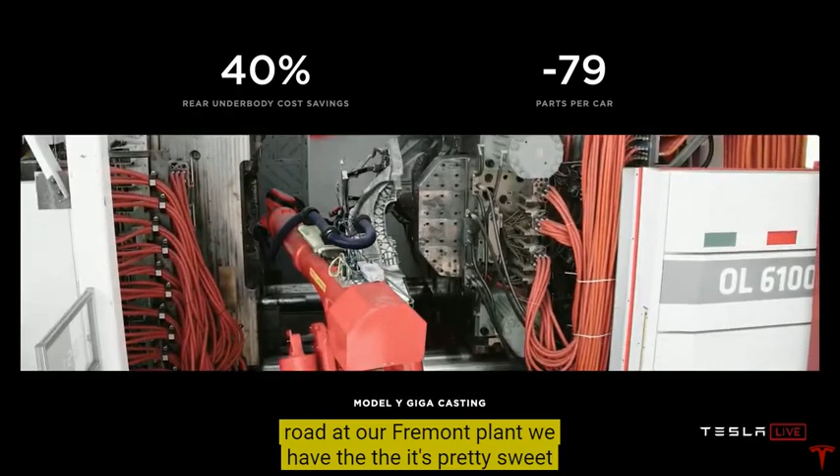So it starts with having a single piece casting for the front body and the rear body. And in order to do this, we commissioned the largest casting machine that has ever been made, and it's currently working just over the road at our Fremont plant. It's pretty sweet. Currently making the entire rear section of the car as a single piece, high pressure die cast aluminum.

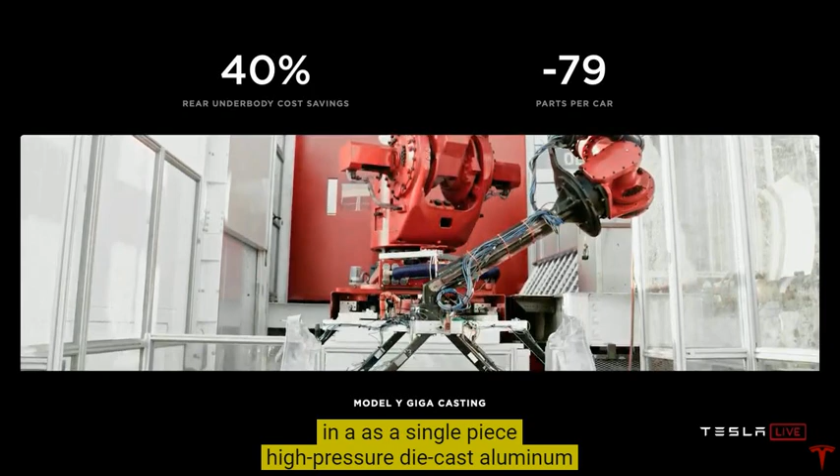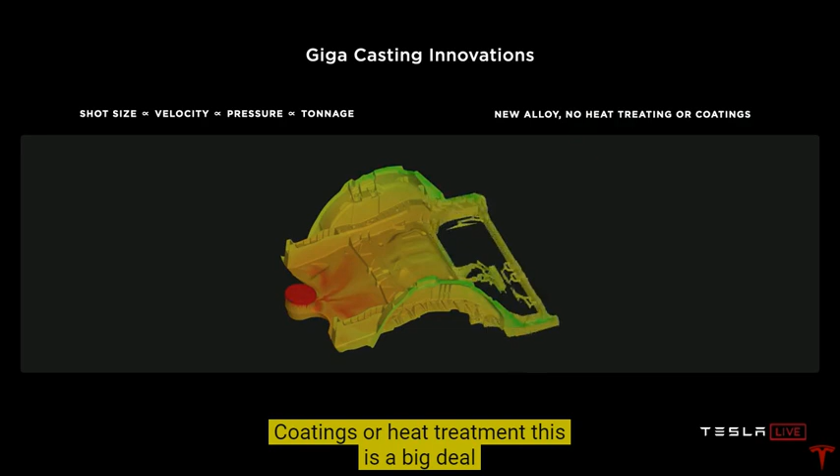And in order to do this, we actually had to develop our own alloy because we wanted a high strength casting alloy that did not require coatings or heat treatment. This is a big deal for castings, especially with a large casting. If you heat treat it afterwards, it tends to deform. It kind of does this potato chip thing. So it's very hard to keep a large casting to have its shape.

So in order to achieve this, there was no alloy that existed that could do this. So we developed our own alloy, a special alloy of aluminum that has high strength without heat treat and is very castable. So that's a great achievement of our materials team. In fact, in general, we've got a lot of advanced materials coming for Tesla, new alloys and materials that have never existed before.

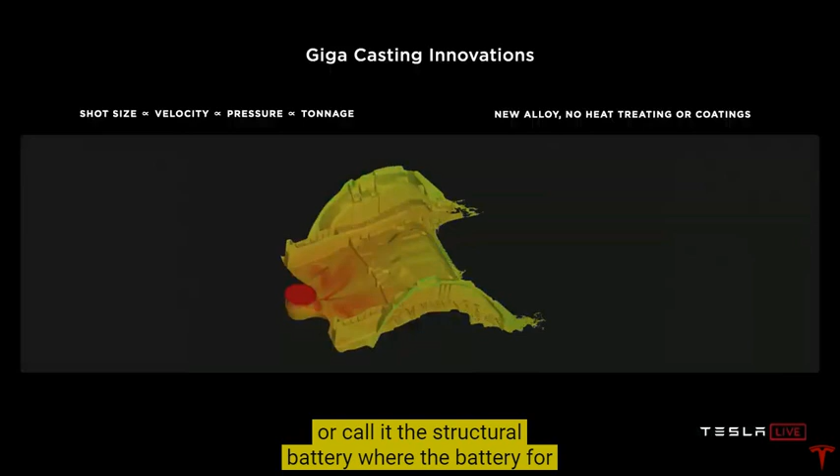So you're basically making the front and rear of the car as a single piece, and that then interfaces to what we call the structural battery, where the battery for the first time will have dual use. The battery will both have the use as an energy device and as structure. This is absolutely the way things are done.

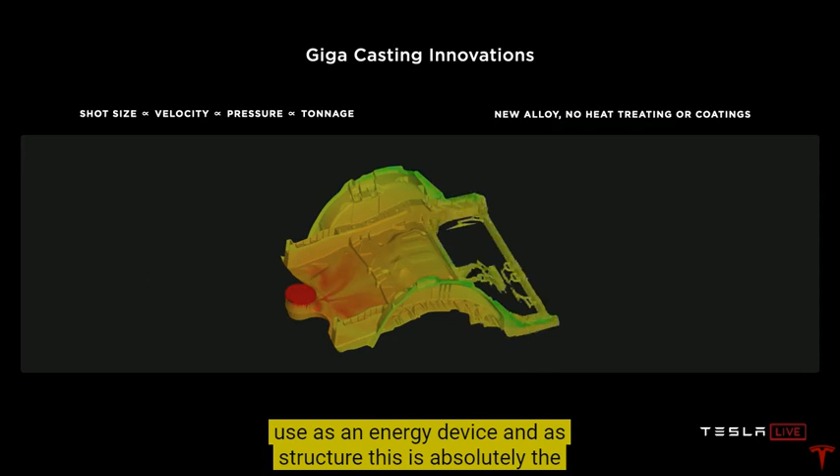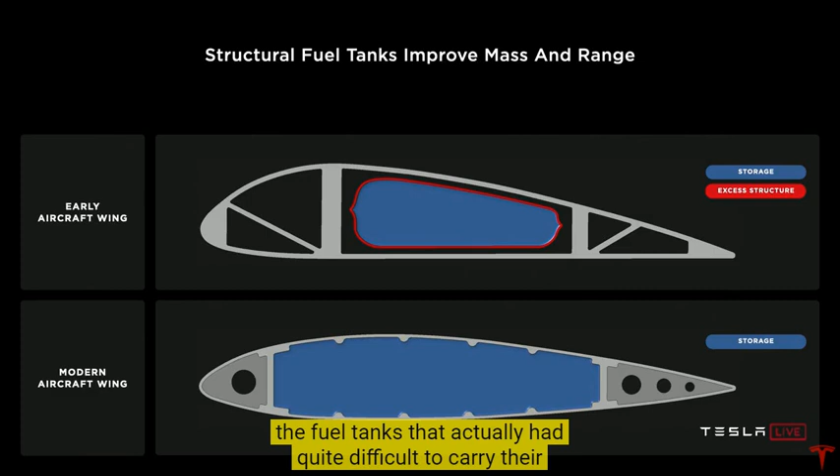In the early days of aircraft, they would carry the fuel tanks as cargo. So the fuel tanks actually were quite difficult to carry. They were basically worse than cargo. You had to kind of bolt them down. It was very difficult. And then somebody said, "Hey, what if we just make the wing tanks? What if we just make the fuel tank in wing shape?"

So all modern airplanes, your wing is just a fuel tank in wing shape. This is absolutely the way to do it. And then the fuel tank serves as dual structure, and it's no longer cargo. It's fundamental to the structure of the aircraft. This was a major breakthrough. We're doing the same for cars. So this is really quite profound.

Effectively, the non-cell portion of the battery has negative mass. We save more mass in the rest of the vehicle than the non-cell portion of the battery. So it's like, well, how do you really minimize the mass of a battery? Make it negative. Make the non-cell portion of the battery pack negative.

It also allows us to pack the cells more densely because we do not have intermediate structure in the battery pack. So instead of having these supports and stabilizers and stringers and structural elements in the battery, we now have a lot more space in the battery because the pack itself is structural.

What we do is essentially, instead of having just a filler that is a flame retardant, which is currently what is in the 3/Y battery packs, we have a filler that is a structural adhesive, as well as flame retardant. So it effectively glues the cells to the top and bottom sheet. And this allows you to do shear transfer between the upper and lower sheet.

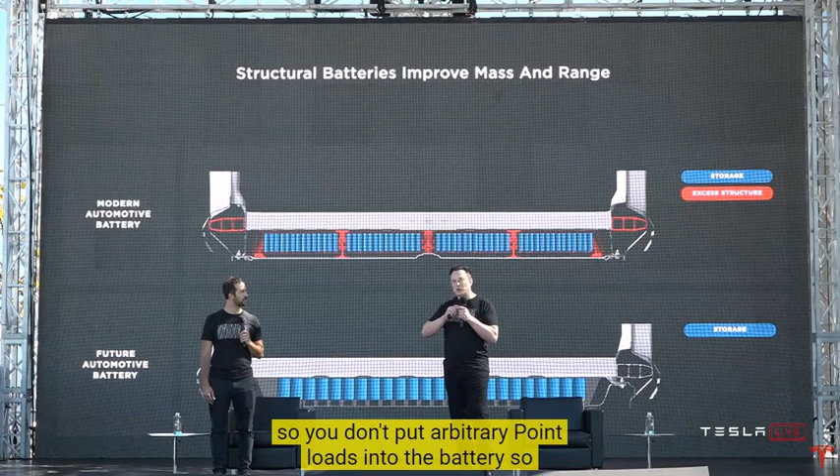Yeah. In fact, if this was like a convertible that had no upper structure, that convertible would be stiffer than a regular car. So it's really major. So it improves the mass efficiency of the battery, and then those castings are also quite important because you want to transfer load into the structural battery pack in a very smooth, continuous way, so you don't put arbitrary point loads into the battery. You want to sort of feather the load out from the front and rear into the structural battery.

It also allows us to move the cells closer to the center of the car, because in the top one we've got all the supports and stuff. So the volumetric efficiency of the structural pack is much better than a non-structural pack, and we actually bring the cells closer to the center, and because they're closer to the center, it reduces the probability of a side impact potentially contacting the cells, because any kind of side impact has to go further in order to reach the cells.

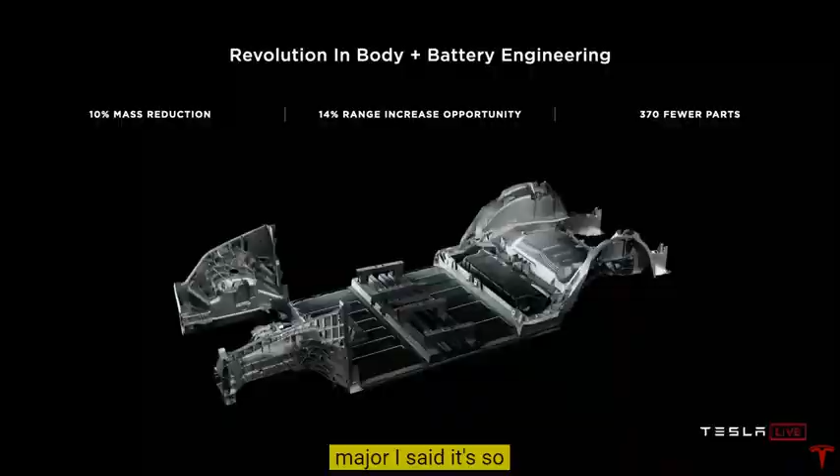It also improves what's called the polar moment of inertia, which you can think of like an ice skater, arms out or arms in. Arms in, you rotate faster. So if you can bring things closer to the center, you reduce the polar moment of inertia, and that means the car maneuvers better. It just feels better. You won't know why, but it just feels more agile. So it's really cool. This is really major. Like I said, 10% mass reduction in the body of the car, 14% range increase, 370 fewer parts.

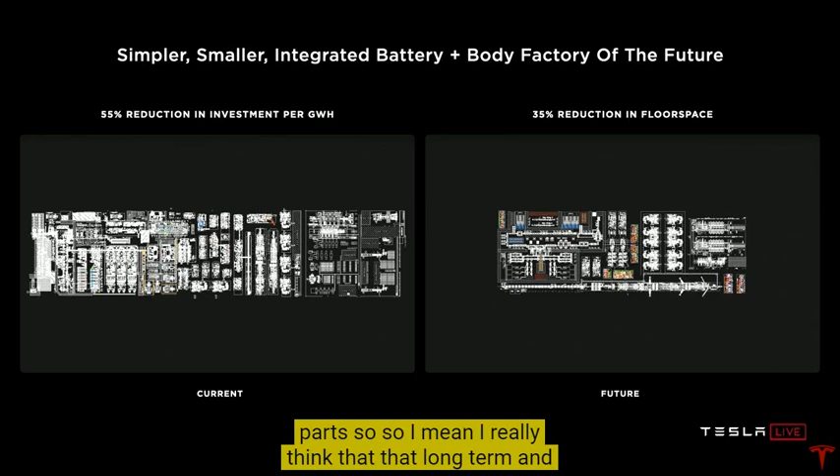So, I really think that long term, any cars that do not take this architecture will not be competitive. And it's not just a better product at the product level, but in the factory, it's a massive simplification. You saw the part removal. It's casting machines. It's the structural battery pack. So we're looking at over 50% reduction in investment per gigawatt hour, 35% reduction in floor space, and we'll continue to improve that as we make the vehicle factory of the future. So it's major improvements on all fronts, from the cell all the way to the vehicle.

And in addition to the improvements we just said on enabling additional range and improving the structural performance of the vehicle, it is worth another 7% dollar per kilowatt hour reduction at the battery pack level, bringing our total reductions now to 56% dollars per kilowatt hour. Yeah.

All right, so stacking it up, we're not just talking about cost or range. We've got to look at all the facets. Range increase, we're unlocking up to 54% increase in range for our vehicles and energy density for our energy products. 56% reduction in dollars per kilowatt hour at the battery pack level, and a 69% reduction in investment per gigawatt hour, which is the true enabler when we talk about how we achieve this scale problem.

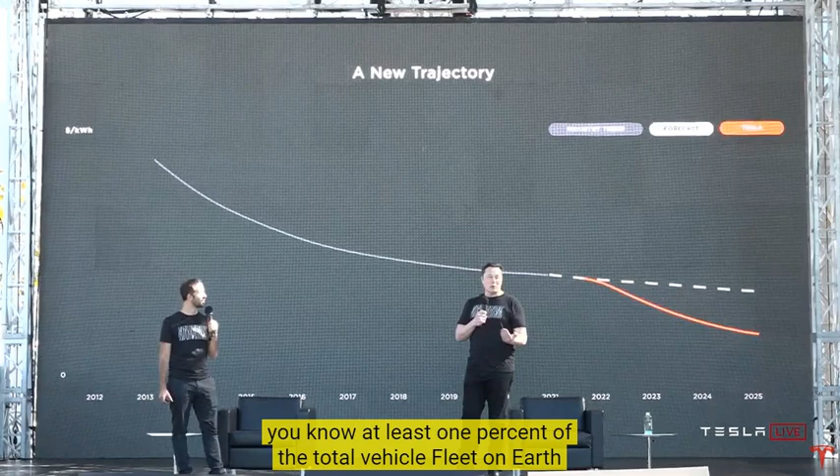So what tends to happen as companies get bigger is things tend to slow down. Actually, they're going to speed up. And they have to speed up if we're going to accelerate the transition to sustainable energy. Long term, we want to try to replace at least 1% of the total vehicle fleet on Earth, which is about 2 billion vehicles. So long term, we want to try to make about 20 million vehicles a year.

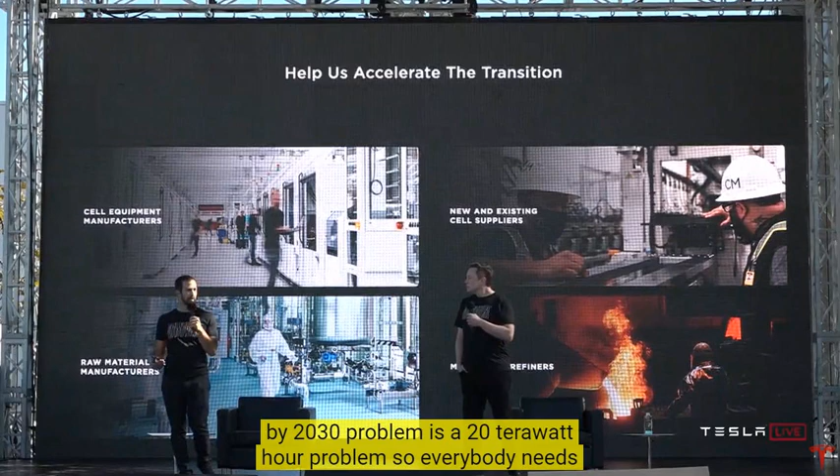But I think it's important to point out that when we talked about 3 terawatt hours by 2030, the problem is a 20 terawatt hour problem. So everybody needs to be accelerating their efforts to accomplish these objectives. Doesn't matter where you are in the value chain, there is a ton to do. You need to rethink from first principles how you do it so that you can scale to meet all of our objectives. Yep. And Elon?

Sure. What does this mean for our future products? We're confident that long term we can design and manufacture a compelling $25,000 electric vehicle. This has always been our dream from the beginning of the company.

I even wrote a blog piece about it because our first car was an expensive sports car, and then it was a slightly less expensive sedan, and then finally sort of a mass market premium, like the Model 3 and Model Y. But it was always our goal to try to make an affordable electric car, and I think probably, like I said, about 3 years from now, we're confident we can make a very compelling $25,000 electric vehicle that's also fully autonomous.

And when you think about the $25,000 price point, you have to consider how much less expensive it is to own an electric vehicle. Yeah. So actually, it becomes even more affordable at that $25,000 price point. Yeah. So we have extreme performance and range. And we should probably talk about the Model S Plaid. What about that?